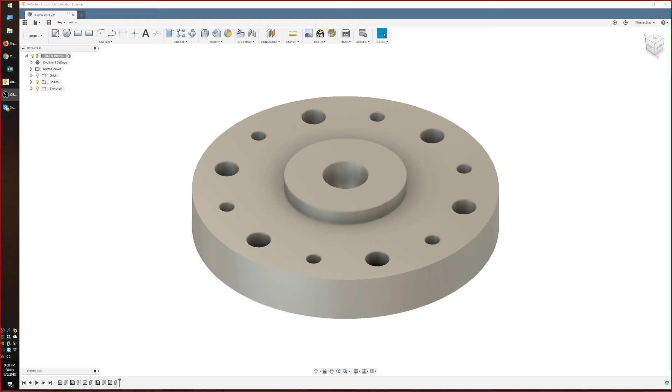All right. So, George, how's it going? Good. I haven't seen you at work today. Oh, were you at work today? Were you not? I took the day off. Oh my God. I needed a day. Well, good for you. A day where I got to go on a trip to Lowe's and buy myself a new tool. That's not a bad day.

This is the struggles of having a full-time job apart from the maker life, as you know and as many other people know at this point. The side hustle slash hobby just always intruding into your life. That's a good thing. It, for me, always will be. I'm not really planning to move on from that, but I like it, and it'll give me a lot more gray hairs in the long run, but I'll take it. You'll feel more accomplished though at the end. Yeah, after many 1 a.m. nights. Builds character. How about you? How was work today? Work was boring.

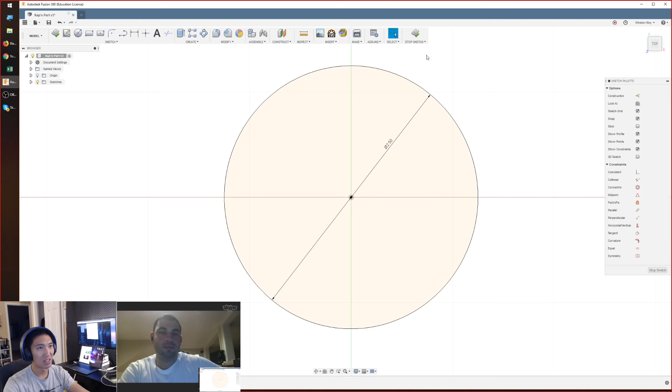But before we do that, let me walk you through what the part is. First we start with the sketch, 2.5 inches in diameter for the body. Extrude that out to, I think it's half an inch, 0.375, 3/8 of an inch. And then we have the little stem here where we would stick in a little handle for a top.

It's a little thicker. So the overall part thickness is half an inch from top to bottom. And I just did a radial pattern of holes around the outside, different sizes. One of them is 0.125, so basically 1/8, with no room to spiral or ramp in for a contour, and the other one is a little larger at 0.2 inches.

And so I'll go over a couple different strategies. How about the middle one? Middle one I think is 3/8. All right, so you got a bunch of different sizes. We'll go over a couple different strategies you can use to just punch some holes in this thing, based on the 2D toolpaths you have available to you.

What's up, RWT? Can you make your cursor highlight so it's easier to see what you're clicking on? I don't know if we're able to do that live, but maybe for the next one we could add that in. Does the cursor not? Oh, the cursor is really tiny, which is the problem. Next time I'll change my resolution to 1080. I'll try and be a little more verbose about what I'm doing to compensate.

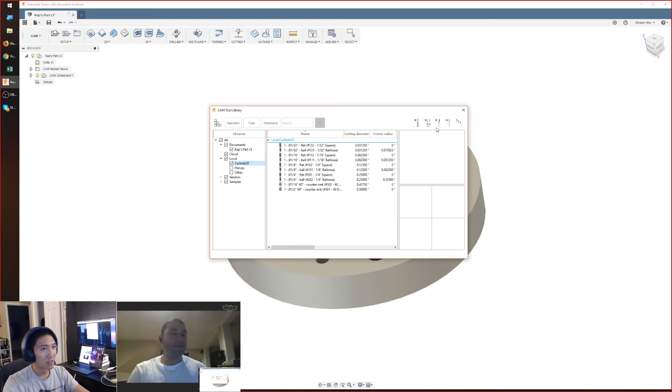All right, so we have our basic part, 2.5 inches in diameter, half an inch tall. So we're gonna go into the CAM window. Before you do anything, you need to make sure that you have some tools loaded up. So there are sample tools in Fusion, which is just a gigantic library of drills and generic end mills, which you can pull from. But I like to create my own little set of tools. Here I've got a list of tools from Carbide 3D that I can draw from and use. And you need to have tools to create a toolpath. So this is sort of the prerequisite.

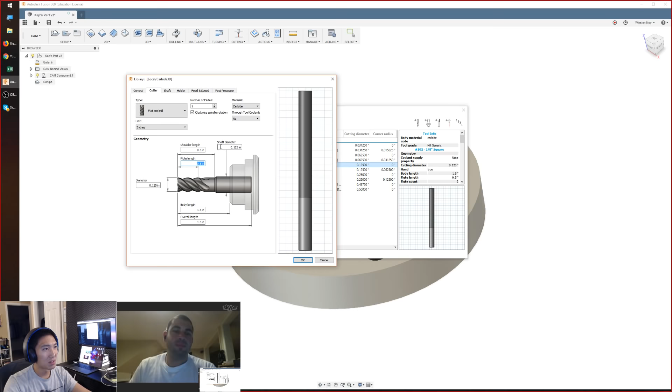So assuming you've got tools. And these are pretty general, right? They don't have to be the specific tool you bought off eBay or anything. Yeah, I'll just open up one of these tools, basically name it whatever you want, and just the cutting parameters. It's a flat end mill. You say it's got 2 flutes or 3 flutes. What's the diameter? How long is it? How long are the flutes? And that's really all you need. And whenever you buy it, that stuff's easily on the label right there. It's just right there for you. Yeah, you should know all this information before it arrives.

Exactly. In the feeds and speeds tab, you can tell it a nominal spindle speed or feed rate, but you're always going to custom tailor or tweak it based on what you're cutting. So I've got a library of standard carbide end mills, but I use them in aluminum, I use them in wood, I use them in plastic, and every single time these feed rates are going to change. Thank you, Kyle.

All right, so we've got tools, and you need to create a setup. So a setup tells Fusion, hey, how big is the stock material you're cutting from going to be? So you create a setup. The first tab is the setup tab, and you can say which way is up. So right now, if you can see the blue arrow, it's facing up, and that's just based on the default orientation of how I modeled this part.

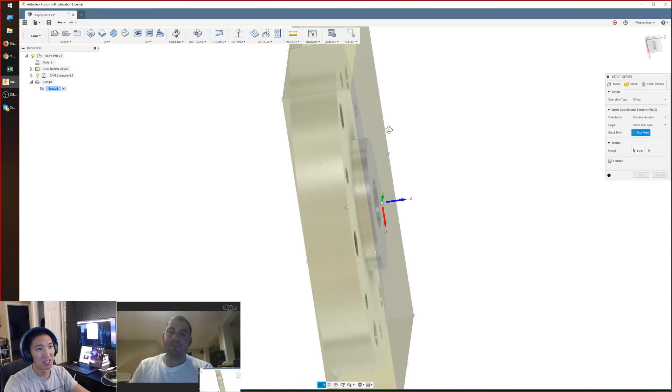And you can change this depending on, oh, hey, I accidentally modeled it sideways, I need a different axis to be Z positive. But here, in my case, I want the blue arrow, Z axis, to be up. If it's not set correctly, you can go into select Z axis and X axis, or basically you can pick any two orthogonal axes to establish a coordinate system. But it's just easiest if you model the part upright in the orientation you're going to cut. And then the most important one, which I know you've screwed up, George, is the stock point.

So that tells you where the 0 point is. So if you're going to zero your CNC by touching the end mill down on the top of the stock, then you want your origin to be at the top of the stock material.

If you're like me and I've often been touching off on the wasteboard, I actually want the origin to be at the wasteboard, so that establishes my zero. So it sort of depends on what you want to do, but you should know where Fusion thinks your origin is. Top of the part, bottom of the part, or some awkward combination of the two.

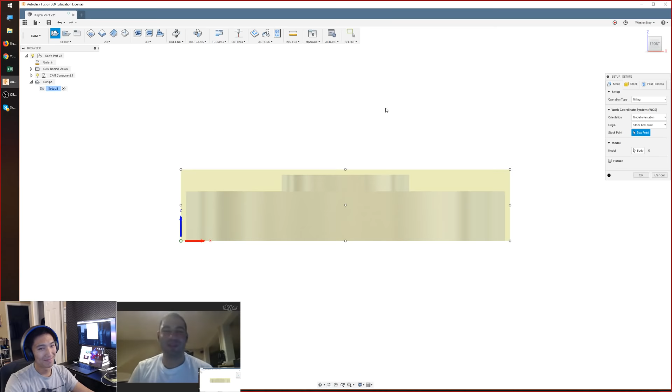Yeah, and the way you know you're going to screw this up, just from my own very recent experience, when you're actually cutting, if you're realizing that the z-axis is way off compared to where it's supposed to be, if it's trying to retract way more or go way past the board, it might be because you just set the origin wrong when you generated the G code. Simple as that, made a nice couple mistakes this week, but quick fixes and then you get it up and running again. So that's what's important to remember in the setup tab.

Next up is the stock tab, and here you can basically say how that yellow volume encompasses the part. If you tell Fusion that, hey, I'm starting with 0.6 inch thick material and my part's only 0.5 inches tall, well, then there's an extra 0.1 inches of material above the part that you want to take into account. But for the purposes of this academic exercise, we're going to say that we have exactly 0.5-inch thick stock. So I'm going to say no additional stock. And so that is our bounding volume of where Fusion can operate.

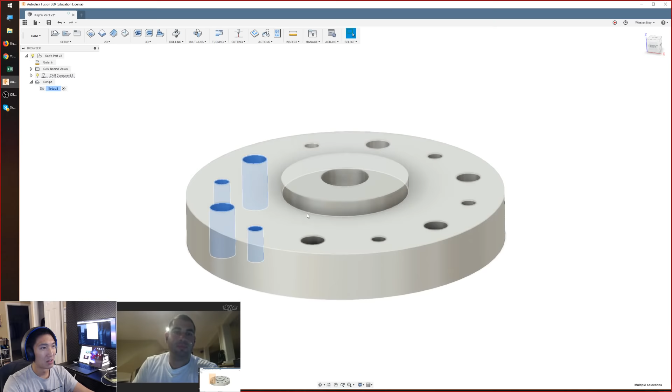So we'll hit OK, close out the setup window, and I think the first order of business is to clear out the material around our central shaft. So this blue face. We have to sort of pocket that out, bring the face of the material down so that we don't have extra material left over after we drill all these holes. And there's a couple ways you could do that.

You could just drop a 3D toolpath on the part, and 3D toolpaths are model aware. So you can just say, hey, I'm going to use a 1/4 inch flat end mill and hit OK. And it'll automatically cut away all the other material around your part. But that's sort of a fire and forget, not very surgical approach.

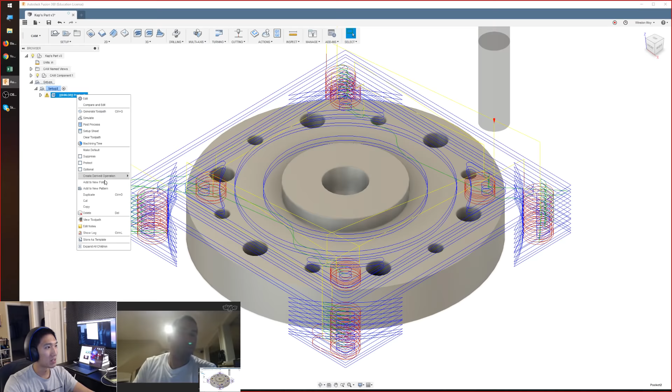What I prefer to do for something like this is to apply a pocketing toolpath. Pick an end mill. We're going to go with a 1/4 inch. We're going to set our geometry. Our pocket selection is this top face. Highlight that. And then I like to just first hit OK, see what the toolpath spits out.

We're going to go through the cutting parameters a little more in depth for some of the pocketing operations for the holes. But for now, I just want to show you how you can select a face and machine away only what you want. So right now, we've got a toolpath that goes around the main stem and takes out the top face. I'm going to simulate it to show you what it looks like. Put on the stock. So it's going to go through and take out most of the material there.

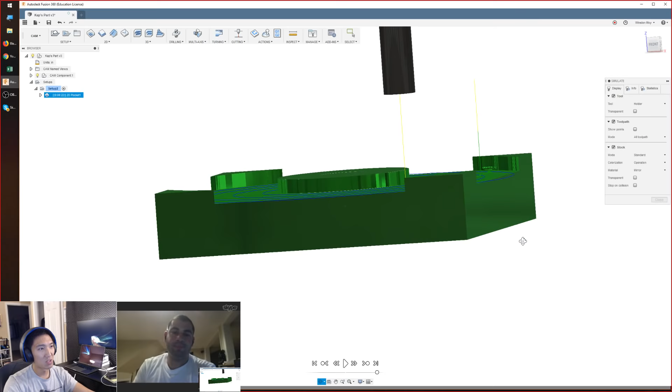But you'll notice that this toolpath doesn't touch the surface completely. And that's because there is stock to leave selected. So if you disable that, it'll actually go all the way down to the surface of the part. All right, so I know I hand waved over a lot of that, but this was just one of the first operations to get it out of the way.

Let's do a 2D pocket to take out some of these larger holes. We're going to use an 1/8 inch end mill. So I'm going to go into my Carbide 3D tool library and pick out an 1/8 inch flat end mill.

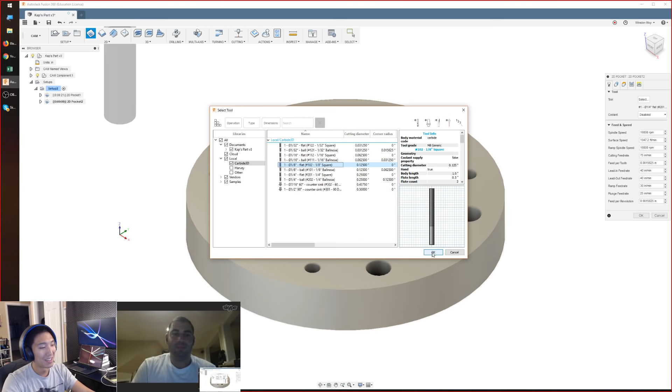Yeah, simulation is an awesome feature. Yeah, and it's fantastic. Depending on the complexity of your part, sometimes it'll also show you part collisions. So you'll see like a gash across your part, and when you simulate it, it's like, oh, that's because the end mill decided to go from point A to point B, and it didn't realize that part of your model is sticking out in the middle of the way or something. All right, so 1/8 inch end mill. Yeah, it's the best way to visualize what the computer's actually thinking when it's giving you that G code there.

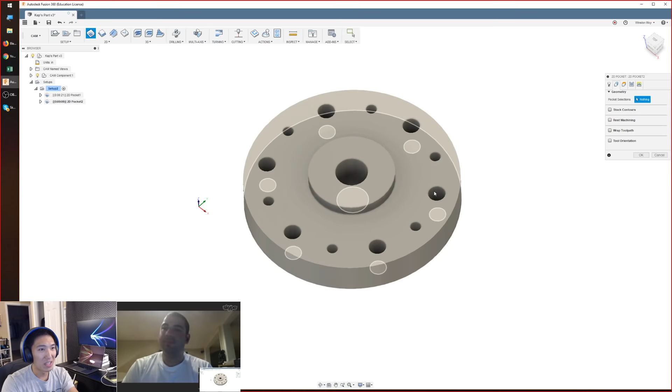Anyway, geometry, pocket selection, that's where you select the contours or the edges or the faces of what you want to machine. So my 1/8 inch pockets, they don't go all the way through. So I can select that face or I can select that contour. But for the big holes, you have to select the edge because there's no face for you to click on. So I'm going to select the edge there. I'm going to select all 6 of the medium-sized holes.

That's some impressive selections there through the top of the part. I always have to flip it around to get to the damn sides. That's because you're probably not a PC gamer. I've got those mouse skills. I am not a PC gamer.

So once you have this selected, that's basically all you need for the geometry tab. For the heights tab, this is where you can establish how far the end mill retracts when it moves or when it pulls out of the part, or when it starts, instead of rapiding into the part, it slows down to a more conservative feed rate. And I'm going to leave these default for now, and I'll show you how you can optimize your tool travel later. So for the passes tab, this is where you really have a lot more control than any other 2D CAM programs like Carbide Create.

So I'm going to uncheck stock to leave for now, but I will do multiple depths. So this means instead of your end mill plunging all the way to the bottom and then drawing a circle, we're going to step down in more conservative increments. So I'm going to do 1/16 of an inch, 0.0625 maximum roughing step down. I'm going to do even step downs, just so that they're sort of evenly distributed.

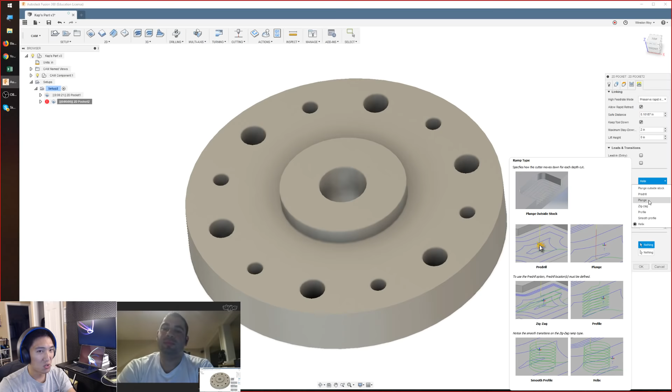So I'm going to go back to the linking tab, and sort of explain that lead in and lead out is, I'll explain that later actually. So ramping is basically the end mill easing its way into the material. Without this, basically how Carbide Create or Easel set up their moves is they'll see a contour, they'll move to the edge of the contour, shove the end mill straight into the material, and get going. And that looks like this.

So the end mill goes basically down into the part and just immediately starts following a contour. So from a different angle, straight plunge into the material, and then it starts moving laterally, which is fine for most materials, but in aluminum, or if you really, really care about accuracy, that's not the best way to go about it.

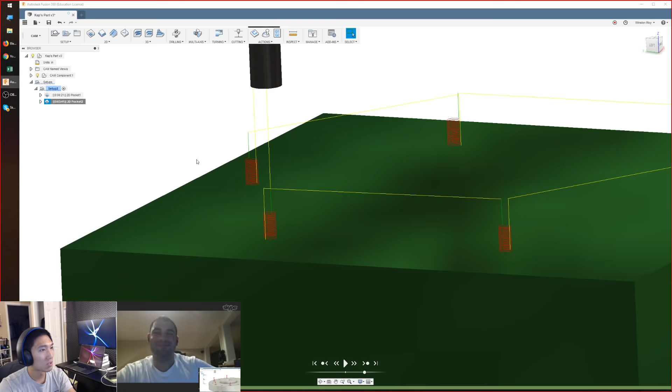And so there are different ways of sort of making it easier on the end mill, and one of them is the profile and the helix. So helix is what usually ends up happening, but the diameter here is set too large, so I'm going to make that really small, 0.05. So a little less than a 16th of an inch diameter helix. And so now what happens is the end mill starts spiraling into the part before it starts cutting.

So that's one way, but the way it's set up now, it's wasting a lot of time spiraling in. So one way to change that is to modify the top height. The top height is basically when your toolpath actually starts planning out its cut. Anywhere above the top height, it's really just moving up, moving laterally to a new position, plunging straight down. Top height is when ramping starts happening, when cutting starts happening.

And so if I set my stock top to this top face, the end mill starts helixing in a lot closer to the part. And I can lower that margin even further by setting the ramp clearance height to something really small. I'm going to say 0.01 just to illustrate how close you can get it. And so now it's getting really close to the material before it starts moving. So if you're sure that this top face is clear, by all means, make the toolpath more efficient and bring the end mill all the way down to the part before you start machining.

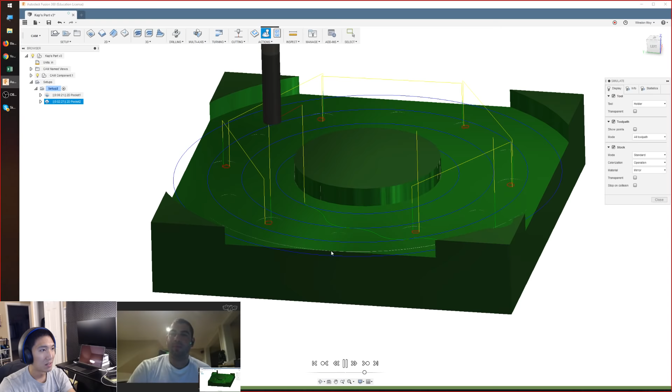If I simulate both of these and go to the next operation, after we've cleared that top pocket, then it starts ramping in really close to the material and it makes that pocket. That's pretty cool.

We've got a question. I'm not too sure what it's actually asking. Maybe we'll ask them to rephrase it. Do you get what they're saying?

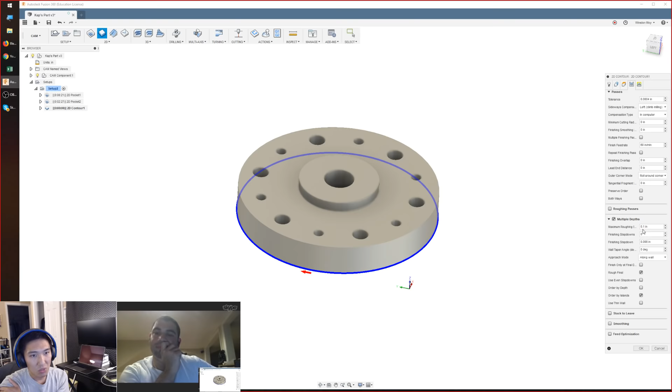So I think what he means is you're seeing basically horizontal striations or just marks as the cutter steps down. So the way you get around that or you improve that is you do a finishing pass. So what's happening is, let me make another. Let me do it as a contour, just to demonstrate. So I'm going to do 0.1 inch step downs.

So what's happening? For those that are watching, the question is, Classic is seeing cutting marks on his plane when he's cutting hard maple. As the end mill is taking multiple step downs, each time it goes around, it's cutting slightly differently, and that's because of tool deflection.

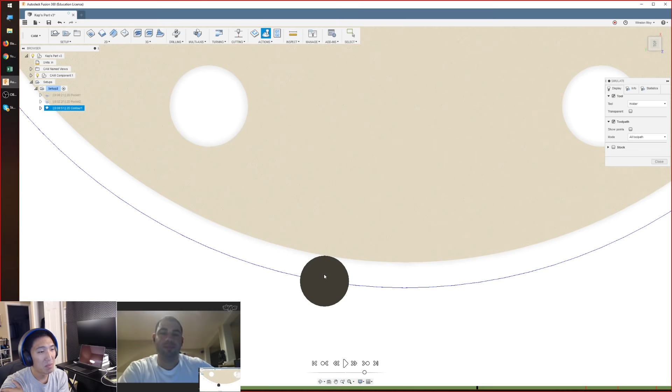So yeah, if you imagine this cutter spinning in a clockwise direction, every time a tooth of that end mill comes around, it's sort of pushing itself off the edge of the material. So this end mill is actually not touching the part when it's cutting. It's actually offset like 1/1000th of an inch or 1/10,000 of an inch. But that's enough that you'll see just a little bit of fuzziness or a little burr between step downs.

And so the best way to get around that is to take one final pass at full depth, sort of just a whisper cut or a spring pass, to clean up that last extra margin of material. Yep.

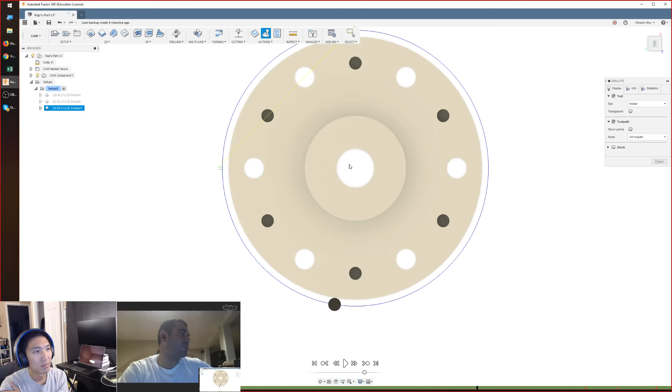And I think I just realized his second question. I think what he's saying is he'd like to just program so that, say he tells it to cut a 1/8 hole and just put in a 1/4 inch end mill instead, so that he's just cutting double the area. But I don't know why we wouldn't just put that in the model at that point. Do you see that second one there? Because I'm not sure I'm entirely following. Trying to do like double the work. Yeah, if you could rephrase that second question, Classic, we can kind of get to it. But I'll try and address a couple things.

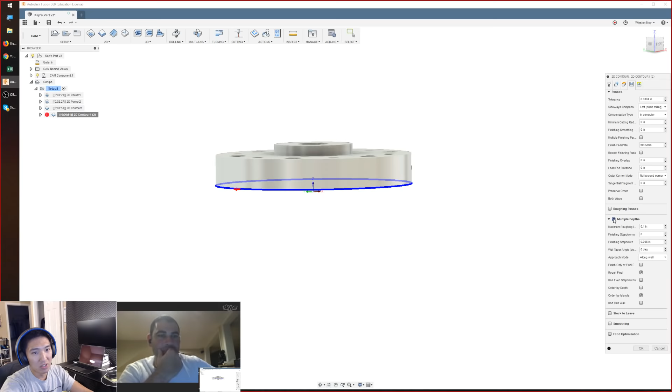So if you're trying to do a finishing pass, like let's say you made this first cut around the part and you're getting marks and you want to clean them up, what I like to do is just duplicate, Control D or right click, duplicate a toolpath, go into it, go to the passes tab and just turn off multiple depths. So that way, the first operation cuts all the way down. Yeah, that's great. The second operation just comes in at the full depth of cut and sort of cleans up that wall. That's a nifty trick. You create that pretty fast like that.

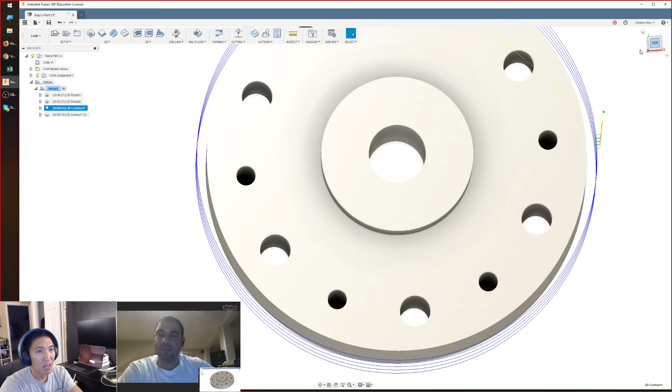Yeah. You can also, to enhance that, because sometimes that last spring pass or the whisper cut won't get everything, leave a little extra stock around it. Just like 4 thou up to 10 thou. And so what's going to happen, I'm going to zoom in from the top down. That first pass goes around, it leaves a little margin, and that second toolpath, if you look closely, is just a little further inside. Look at that. That means when that comes around it's cleaning up and exposing fresh material all at once.

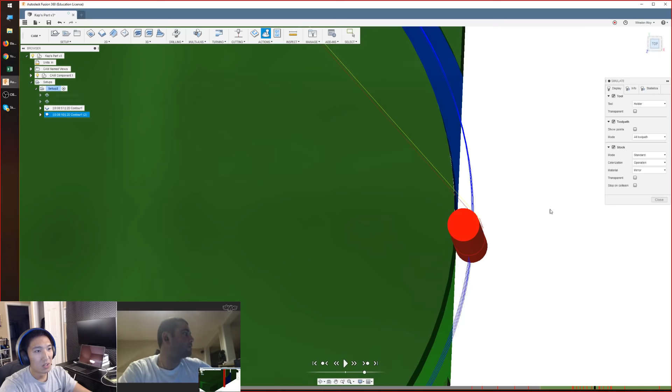And what that looks like in the simulation, run on the stock, is first pass and then second pass. Gotta pause it. So it's exposing just a little more material when it's coming around again. I think that might actually answer his question from what it looks like. Cut the same spot twice, clean it up with another end mill. Same kind of concepts there, but let us know, Classic, if that kind of answers it for you.

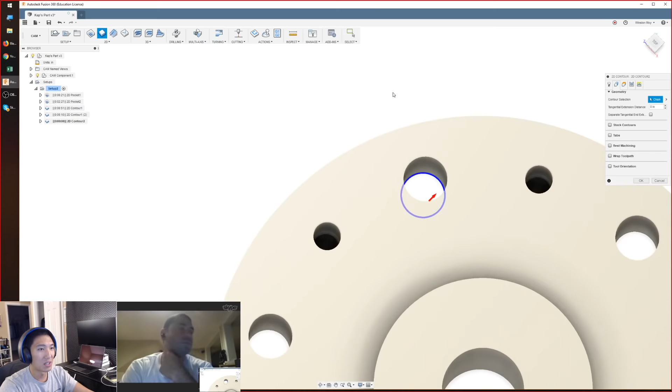All right, so technically where we should be is just finishing these first holes using a pocket operation. So pockets are one way to make a hole. Contours are another way. Contours are what I just used to cut around this part, but you can also just select the inner radius, and I'm going to turn off lead in. And it'll basically just trace the bottom part of the hole.

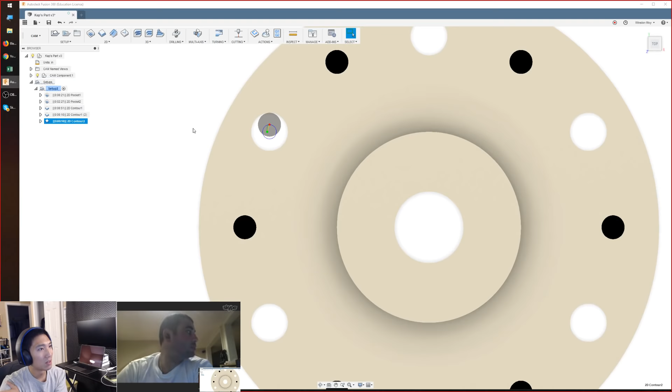You could, of course, do this in multiple step downs, which is much safer. Let's say 0.1, even step downs, whatever. This is just as an example. So you could come down and cut out a hole that way. Why you would use pocket versus contour: in holes like this one, where your diameter is less than 2 times the diameter of your end mill, your end mill can walk around that hole and not leave anything in the middle.

If you were to contour the center hole, you would actually leave a little plug of material in the middle that could break loose and jam the cutter. A really small bit of stock that's left over isn't going to cause any issues, but you never want unexpected wood where you don't know it's going to be when you're cutting, right? The fewer surprises you have, the better. And so in a case where your hole is larger than 2 times the diameter of your end mill, I'd rather use a pocket and methodically just clear out that hole completely.

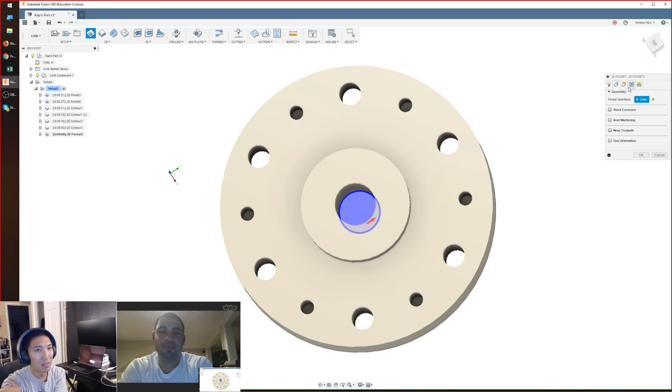So instead of that contour, I would rather pocket out that entire hole. We'll do step downs of 0.07, no stock to leave, just run it. And you could have also done a contour with tabs, right? I mean, that would be fine. But getting tabs in that little section in the middle... Plus, that little nub, its footprint is very small, so it's very liable to tip over, be knocked over, so it's just better not to tab that part.

Good point. Yeah, agreed. So we've got holes about 2 times the diameter, down to 1 times the diameter. Holes above that, you can use contours, you can use pockets, it doesn't matter. For the smaller holes, I like contours just for efficiency's sake. For bigger pockets, use the pocketing operation just to make sure it's more complete. Or if it's like a massive pocket, then you could tab that little core in the middle that would be left behind.

For these holes, 1/8-inch holes, you can't move laterally inside that hole because that's the same diameter as your end mill. So you could either get a smaller end mill, or you could use a drilling operation. Now, most people say you shouldn't use drilling operations.

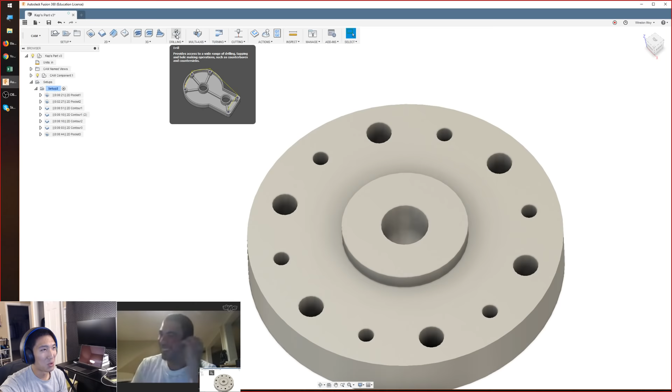Got a plane coming. That is a motorcycle roaming our neighborhood. That's a motorcycle? Wow, that's... yeah.

Great. Anyway, so most people say drilling operations don't work well in a CNC router because the RPMs are too high. You just get scorching on the walls. But for short drilling operations, it's pretty okay. That's how I made my DIY vacuum table. I just took a 1/16-inch end mill and just pecked out a bunch of holes. So for these 1/8-inch holes, especially in wood, I wouldn't do this in aluminum, but in wood you could totally get away with doing a peck drilling operation.

So the way you use that is you select the tool. I have the 1/8-inch selected. RPM, you're not controlling that, the router's in control of that, not Fusion. Plunge feed rate, pick something safe, 15 inches per minute. Retract can be pretty quick. We'll go like 45.

And I don't know how many Maslow users there are out there, but this type of drilling operation is going to be, I think, even more useful for the Maslow users because you're able to cut away without pushing the router away from the plane. I'm going to be making a video about it on my YouTube channel. I don't want to get too much into it here, but this is one to pay attention to if that's your CNC of choice. So sorry, I keep going.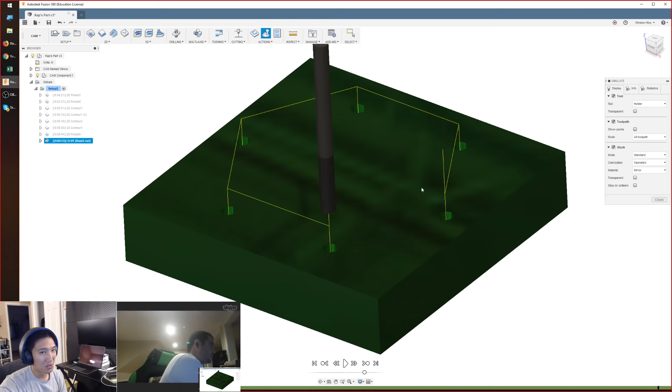That's right. So if you select the holes and you hit OK, your drilling operation is going to look something like this. Straight down, straight back out, and that should be okay. What's a safer way to do this is to peck drill it so that you retract the end mill at certain increments so that you can clear the flutes and make sure that you're not just grinding sawdust into the walls and causing friction and burning and terrible things like that.

So the last tab in the drill operation is cycle type, and you can say something like chip breaking with partial retract, and that gives you a couple more options. And how that works is you can say, I'm going to peck in 0.05 inch increments. When I drill an accumulated depth, so I'm going to say 0.15 inches, it's going to retract out. Chip break distance is how far you're backing off each time. I'm going to do 0.03. I think that should be able to illustrate the point.

And I'm going to simulate this. I'm going to turn off stock just so that you can see what's going on. So if you look closely, the demarcation of the flutes on the shank, you can see it's going down, it's coming back up, and it's going down. So from the beginning, down by 0.05, down by 0.1, down by 0.15, and then it retracts all the way.

That's pretty cool. And so doing that, you can sort of guarantee success by making sure your flutes are cleared, and it's a lot less stress to do it this way than to just plunge the end mill all the way down, all the way back out. So that's my preferred way to drill out. I'm definitely going to be using that in the future. That's pretty sick.

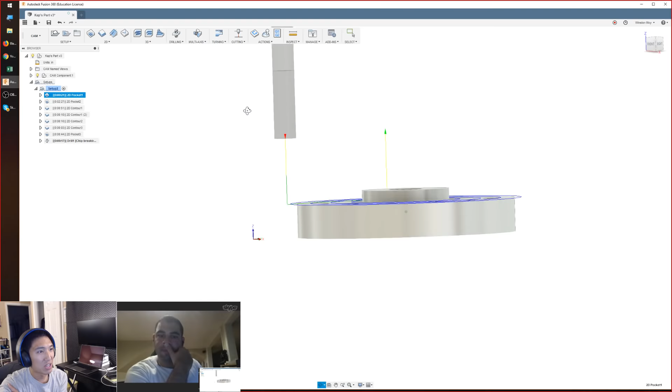I think he said facing it, right? I want to make a flat surface. So if we talk about that first operation, where I'm just taking the part down and building up that little core in the middle, I can use multiple depths and say, instead of coming down 0.1 inches at a time, I can make really tiny passes. I can do 1/32 of an inch little cuts, so that each layer that I'm cutting is really low stress on the CNC.

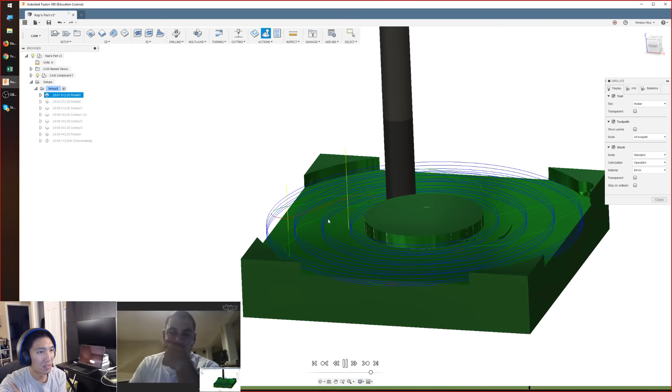So I'm just coming down layer by layer, 0.03 inches at a time. You can change that step down to whatever you want until you feel comfortable that your machine can handle it. Yeah. I could do this entire thing with an 1/8 inch end mill, so I don't have to change tools. If you're comfortable with tool changes, great. If not, just go slow and steady until you develop the workflow and the right checklist to make sure that you can do it properly.

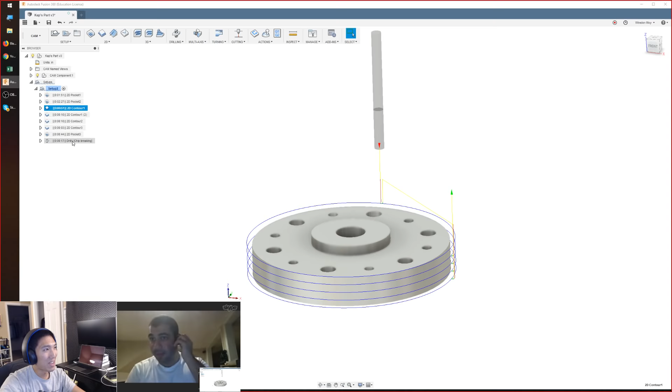If anyone else has any questions about specific toolpath parameters that they want to get a little more info on, just drop them in the chat. But I'm going to run through my nominal process of how I would tackle this piece. It might be a little fast. Some of the topics might be a little more advanced, but I just want you guys to have an understanding of how to tackle this, or different ways. Yeah, this will be recorded, so everybody can play it back later. Yeah, it's just good to get an understanding of what are the possibilities, what are the variables you can play with, so that you know what questions to ask later.

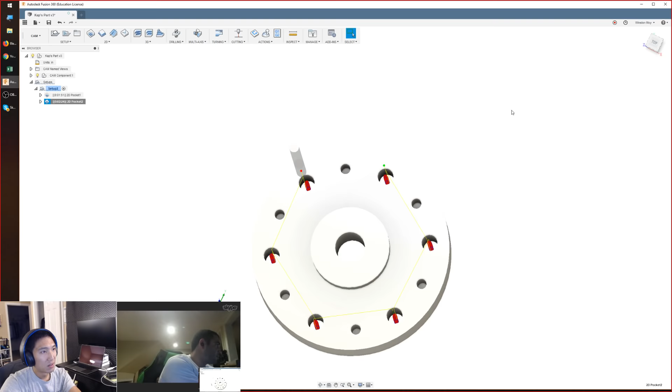All right, so we've assumed that we face the part down to this level. When I'm doing this pocket, that's pretty well optimized. I'm going to do one thing different. I am going to use some stock to leave. 0.01 inches, nothing axially. I just want a little extra thickness on the walls, such that when I'm cutting, you can see the end mill is leaving just a little extra on the walls. I'm going to come back with a contour operation, I'm going to create a derived operation, 2D milling, 2D contour. And so basically, using the same tool, same geometry, it creates a 2D contour operation based on the previous one.

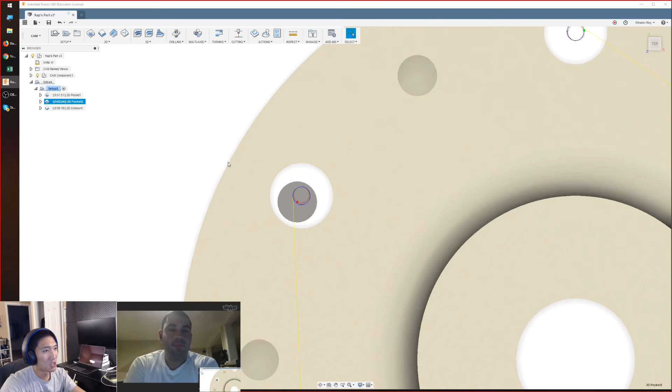Yep. I'm going to use multiple depths of about 0.1 inches because most of the material in these holes is gone. So I can take a little more aggressive pass, and that's just going to clean up, with no stock to leave, the rest of the walls. So first the pocket, then that cleanup contour. And the two of them together should leave me with a pretty good tolerance hole. Because most CNC machines, there's a little backlash, they will actually create a smaller hole. So you got to come back with a really light cut that doesn't stress the machine, and the machine can just effortlessly move out to that outer boundary that it needs to cut. Gotcha. So initial pocket, hog out most of the material, contour the rest.

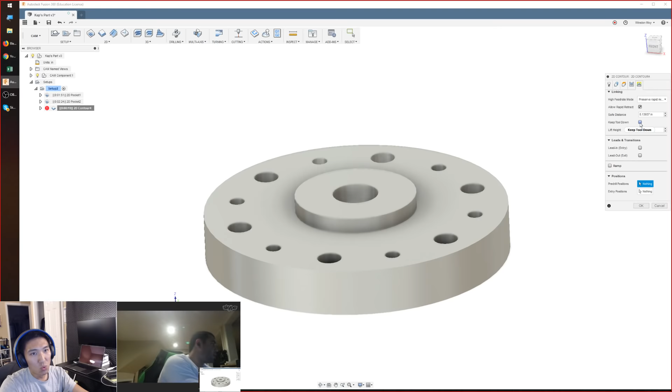And since I'm doing this contour as multiple step downs, when I simulate it, I'm going to turn off stock so you can see it. Go to contour operation. It's going to go down, go around, and step all the way down. If you didn't have keep tool down checked, it would retract in between each layer. So that's one way to speed up the process. If any of you have drilled holes by watching the end mill go down, move around in a circle, go all the way back up, then go all the way back down, that's because you didn't have keep tool down checked. And so that saves a bunch of time while you're waiting for the Z-axis to move.

Oh my god. You just taught me that.

Oh, that's sad. All right. Still a noob, that means. I'm still getting there. That's great. Could have, should have kept that to myself. Blue circles. All right, anyways. Oh. All right, I think I understand.

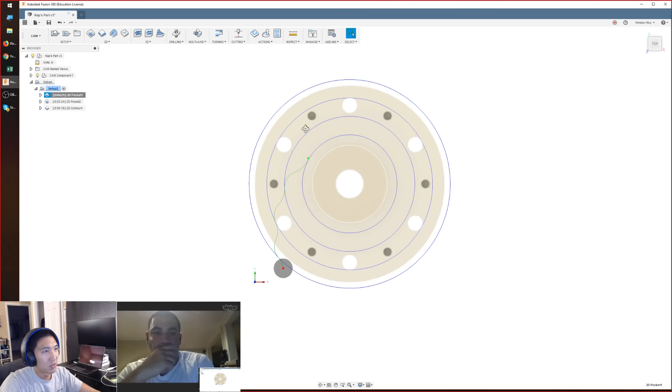Classic. So he's asking about step over. He wants to step over at 1/8 intervals. Computer's slowing down. So I'm going to change this back to, so let's say you start with this toolpath, and to bring your material down to this face, you're going to have a lot of sort of concentric grooves in your part because your step over is really large.

So sort of your cleanup, your finishing for that facing operation would be to, I just duplicated that pocket operation. I'm going to go into the passes tab, and I'm going to change the maximum step over down to, I like about 60% of the tool diameter, so like 0.15. Or you could reduce it down to 1/8. So now you can see initial toolpath, follow-up toolpath to clean it up. Your step over is a lot smaller, and that should give you a much smoother finish on the top. Yeah, I think that's exactly what he was looking for.

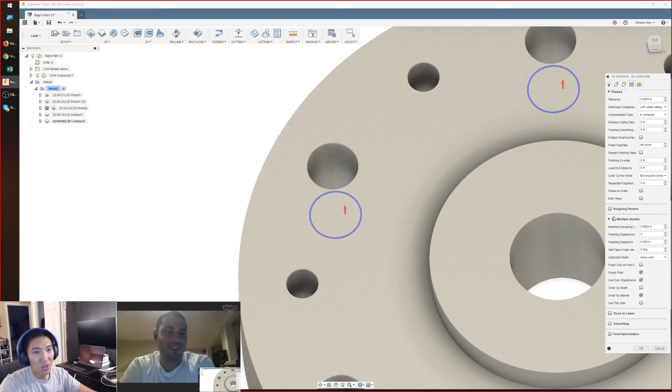All right, so we've got medium-sized holes, sort of pocket to clear it out. We could actually do that as a contour. So you can see there are multiple step downs there. So to do that more efficiently, what I actually like to do, create a derived operation. It's a lot of them. 2D contour. Whoops. I canceled that prematurely. 2D milling, 2D contour. No multiple depths. Ramping all the way down to the bottom. Let's go about 5 degrees.

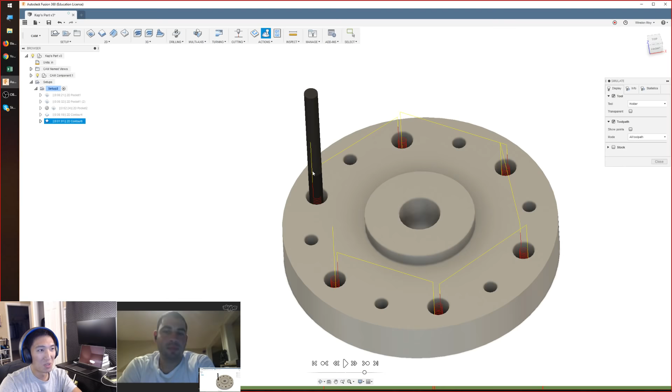And what that's going to do is your end mill is going to spiral all the way down to the bottom of the part. It's not going to stop, do a layer, then step down again. It's going to spiral all the way down till it hits the bottom. It'll move in a circle just to make sure it's gotten everything, and then it'll retract. So it's one continuous motion. And that's the quickest way to contour a hole, assuming your diameter... Does it do a full circle at the bottom, right? Yes, to clear it all off at the bottom. Yeah.

So it's spiraling in, hits the blue, and it does one complete circle, and then it steps back. So that's the smoothest way to make a hole. If you want to make sure you get through it, you could actually choose the bottom plane to be the bottom of the stock instead of the bottom of the model, so that you know you're getting through your part, and you cut through some of your wasteboard at that point.

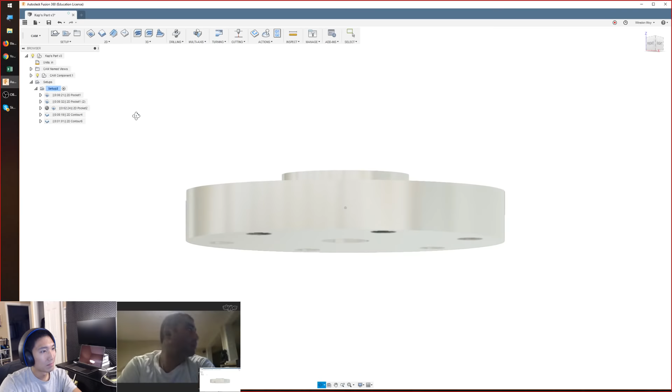But that's to confirm. Oh, did we lose you? Because I'm full on the Skype here. I was. What have you studied? I did my undergrad in mechanical engineering. We had almost no hands-on experience with CNC. We made our own G-code by hand once for a class project, and my teacher screwed it up. And I never touched a CNC until after I did grad school. So, engineer by training, but all of this actual digital fabrication stuff is self-taught.

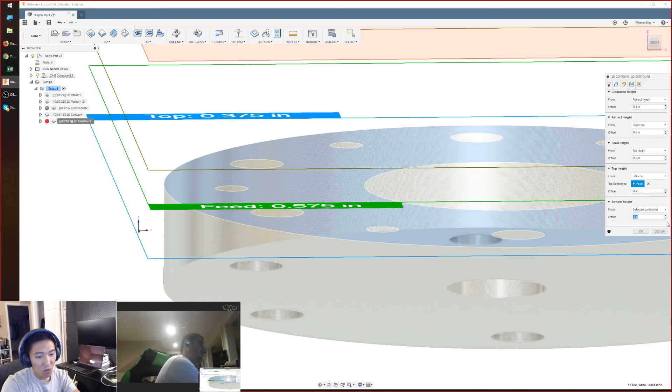So what George was talking about is if you want to make sure that you cut all the way through your part, sometimes you leave an onion skin on the back, you can go into the contour or pocketing operation, go to your heights, and normally your toolpath would end at the selected contour. So since I selected these bottom rings, it would stop there. I can say overshoot that by negative 0.03 inches, let's say. And now the toolpath shoots through the bottom a little extra.

So you can use that to sort of guarantee a cut, or if you didn't cut through the first time, you just repost this G-code with that little tweak, and that'll make sure you get a clean cut all the way through.

Yeah, exactly. Yeah, that's why the electrical engineers struggle in here. Yeah, but you know, some people know about their outlets, and then some people... We're gonna do. Yes. We gotta do like engineering, Mechies versus EEs, some cool project of some sort.

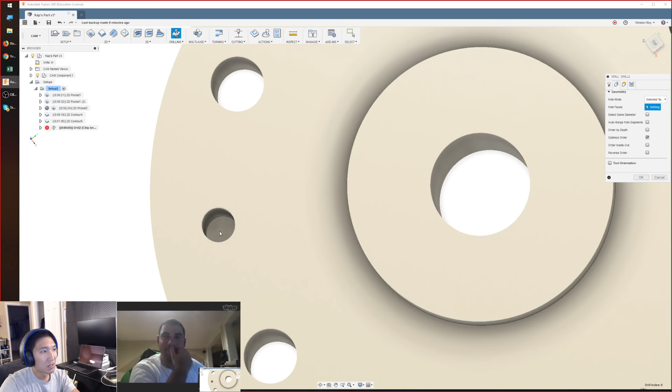All right, so you cut through all the holes now. As per what I explained previously, I'm gonna do selected faces. You pick the walls of the hole, so it has a reference for the axis of drilling for the drilling operation. So drilling operation for the holes that you can't afford to move around laterally in, and then I'm going to do a pocketing operation on the center hole.

Now I'm going to do something different. I'm going to pick the top hole. Sometimes your contours are hard to access, either because there's a construction plane across the middle or just some geometry in the way. All you need to do is select the right contour such that when you project it in the 2D plane, it's in the right spot. And then change your bottom height to stock bottom. And so now this pocketing operation will still go down to the bottom, even though I picked the contour around the top. But that pocket I want to do in multiple step downs.

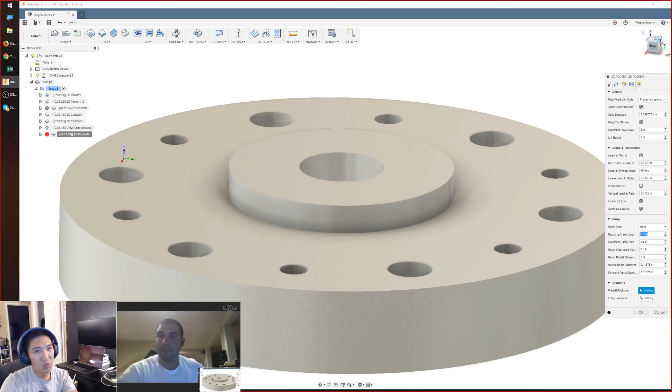No stock to leave, multiple depths, 0.06. Let's see how that looks. That helix is wasting a lot of time. So I'm going to... helical ramping moves are great for aluminum in particular, just because even if your end mill is center cutting, that initial plunge into material can be a pretty shocking move from a physics standpoint. You're basically engaging the entire area of the end mill all at once. So 2 degrees up to maybe 4 degrees is what you want to shoot for a helical ramp in aluminum.

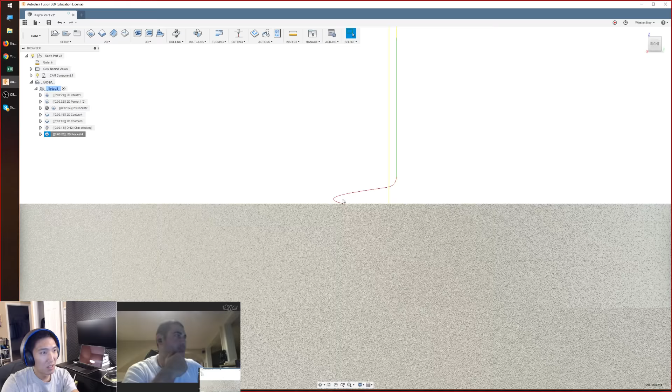But for wood and softer materials, you can actually increase that angle to like 8 degrees. And so now you can see that that helical move is a lot faster. And furthermore, I'm going to adjust the starting height so that it starts much closer to where the part starts. So now we just have a little bit of that helix shape sticking out beyond the part. So let's see what we have so far. Select the entire setup, select simulate, show the stock, and just run through it.

And for those that haven't seen the simulate tool before, you can actually see how long this entire thing should take. So that's another very useful feature of the simulation tool. In the statistics option, it's showing about 5 or 6 minutes to cut this part. And I can also see that, hey, I forgot to do the outer contour. So always simulate every now and then, just to get your bearings on what's left to do.

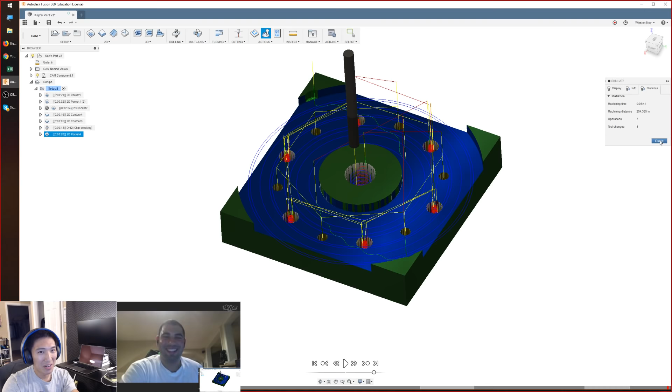So I'm going to select 2D contour, pick that bottom contour around it. It's still defaulting to the 1/8 inch end mill, 40 inches per minute. I actually want 60. Passes, we're going to do 1/16 inch step downs, or 0.065, close enough. Even step downs, no stock to leave. It's got a little lead in, which I'll take. The lead in is that little initial U shape. So when the end mill comes in, it's easing into the material, making contact slowly. Nice thing to have.

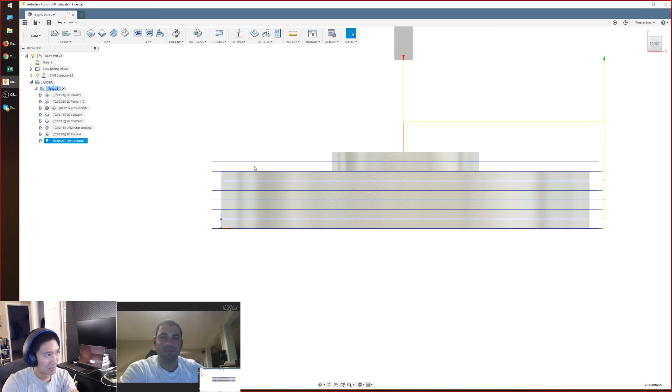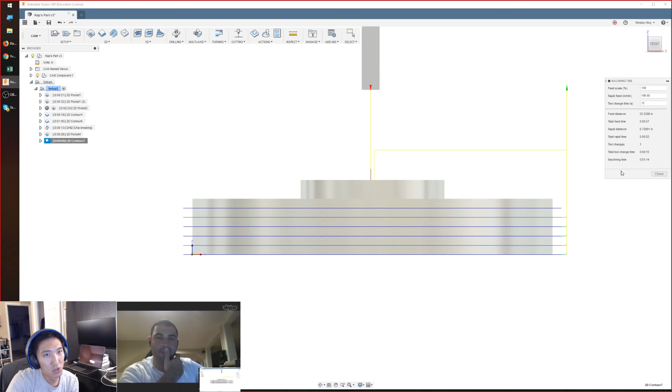Can you also right-click each cut? Yes, you can. Over here, you go to machining time, and you can look up just that toolpath's statistics. That way if you see the whole thing's taking an hour and you got to see what got screwed up, you can single out what looks to be the longest for some weird reason.

You know what's also taking an hour? This live stream. Yeah, you see, I was on the money. I told people, I prepped them, it's gonna take an hour. Winston, you just know so much. That's a problem. You got so much knowledge to share. I think you're just slowing me down. I like to keep the people happy. I like to communicate, you know. You are too happy. Anyways, now you're the one that's derailing this whole thing. We were almost there.

So if we simulate this entire thing real quick.

We're getting to witness our true relationship here.

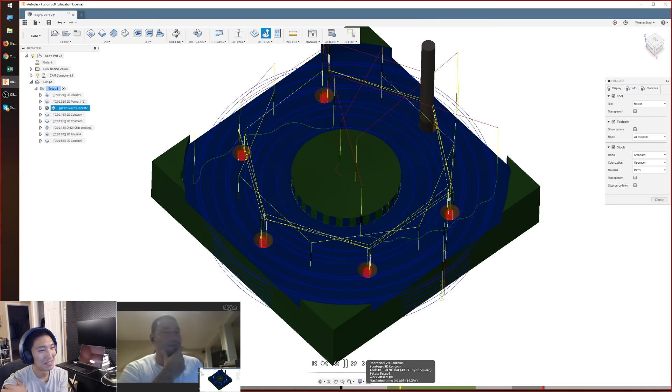So at the end of the day, simulate. Drill, come on. Bore out the center, cut around the outside. That's it. Some of the ways you could improve this, if you notice lines around the outside or the outer surface not being perfectly smooth, is to run that contour with some stock to leave, about 0.01 inches, and then, like I said before, duplicate it, turn this into a finishing pass, just single pass, no multiple depths, no stock to leave, and it'll come around and clean up the outside. So initial rough contour, and then that little finishing contour that's just inside of it to clean up the walls.

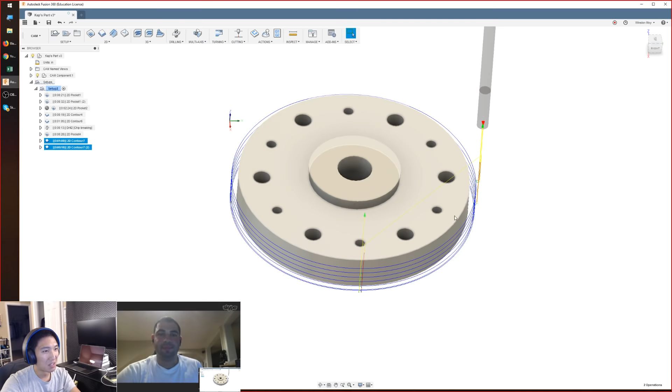So if you're looking for ultimate precision and you're getting just a little bit of rubbing or lines horizontally across the part, or you see a little U-shaped indent where the end mill is first going in, and that disturbance is digging into the part just a little more than you'd like, run that really light finishing pass at the end and that should clean it up.

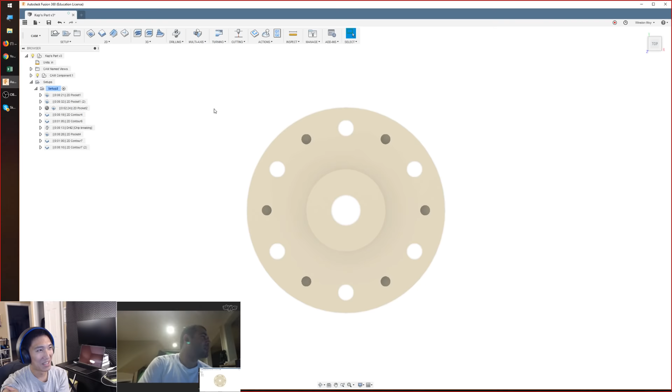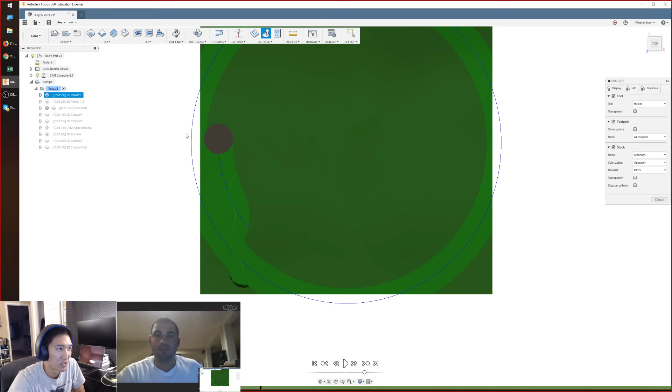Should you use adaptive clearing instead? So adaptive clearing is good because it controls the lateral and axial cutting loads that your machine experiences by controlling how much you're digging into your part. So if we look at this pocketing operation, I'll look from the top down. Hopefully that shows. As you cut, the entire cross-sectional area of your end mill is plunging into material at all times. When it comes around the next time, it's still basically shoving the entire face of the end mill into fresh material. So in aluminum, that can be really stressful, and so a standard traditional 2D pocketing operation kind of sucks.

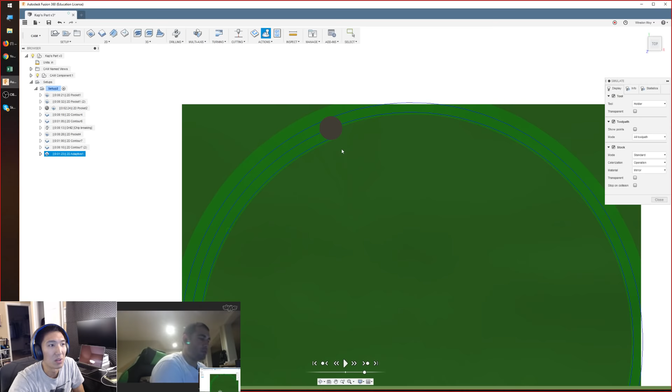If you do this with a 2D adaptive, I'm going to select that top face. I'm going to simulate that. We'll go more than one pass. About there's good. Top down, you can see that only a fraction of that end mill's cross-sectional area is engaging material. And sure, you could approximate that with a smaller step over in a traditional 2D pocketing toolpath, but there are some cases, like when your part isn't round and when you're going into corners, where that small step over gets you less cutting load, it won't always work out that way. So adaptive, you're always engaging with, here, about 40% of the end mill. I'm just going to make a really quick part to show you where 2D pocketing operations fail. So in corners, they don't work so well.

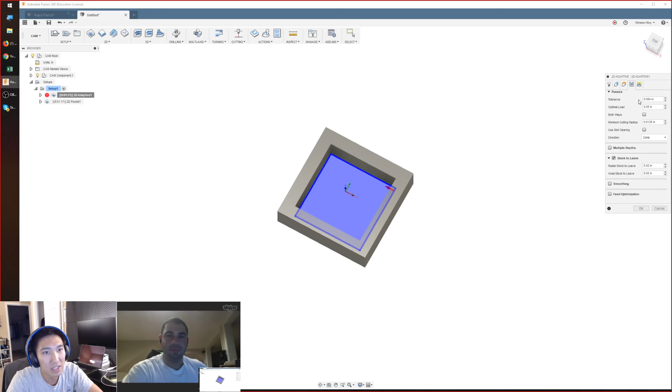So I'm going to really quickly just throw in. So we've got an adaptive there, and I'm going to throw in a traditional pocketing operation with a step over of 0.05, roughly 40%. Let's see what my adaptive's optimal load is. It is also 0.05. So in most cases, that adaptive toolpath step over and this pocketing are pretty close. So you would think the cutting loads are going to be the same. But if you simulate the pocket operation, it's spiraling in stupidly.

Man, it's going all the way down. All right, so this is the cutter moving through material. It's only engaging with 40% of the cutter's cross-sectional area. Then when it gets into the corner, all of a sudden, you've got this wide arc around its edge that is in contact with material. So the load, the strain on the spindle has suddenly gone from 40%, it's basically doubled the contact area.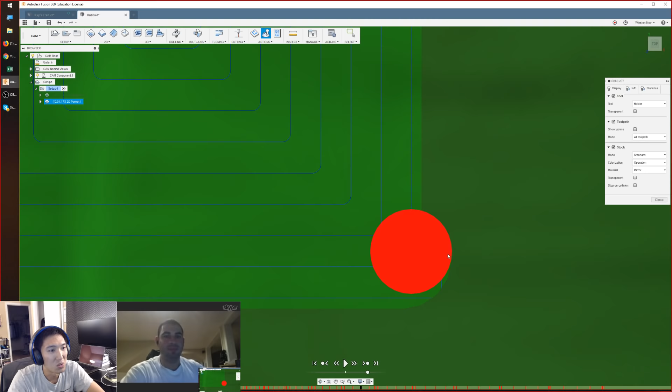Yes. And so your end mill is going to dig into the part a little more. You're going to get a little more deflection. It's going to want to kick out, push itself down, and actually it's going to push itself to the left if this is spinning clockwise. And so the loads are fluctuating wildly as you go through this corner. And that's with a traditional pocketing operation.

In an adaptive, I'm going to skip ahead to after we start cutting. It is always, at any given time, using only 40% of that cross-sectional area. Even when we get into the corners, it is coming back and taking little nibbles such that the engagement's only 40%. And so that is where the adaptive really comes in handy.

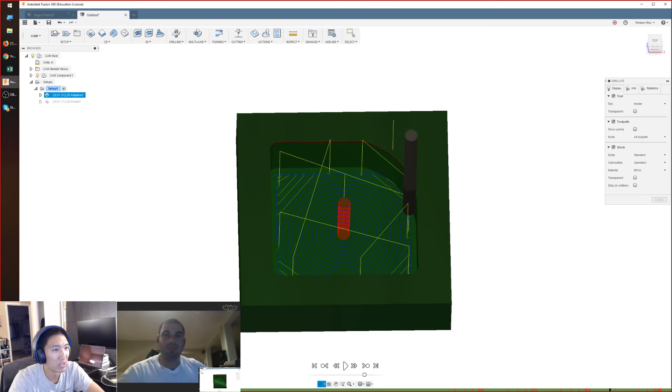In aluminum, where your machine's pretty close to its performance envelope, the adaptive really makes it easier on the machine. But in wood, a comparable adaptive is going to take longer than a similar pocketing operation. So here I'm going to do a pocketing operation, use basically a full step over versus an adaptive's. I need to use the same end mill for a good comparison. And let's say the optimal load is like 0.2. That actually came out okay.

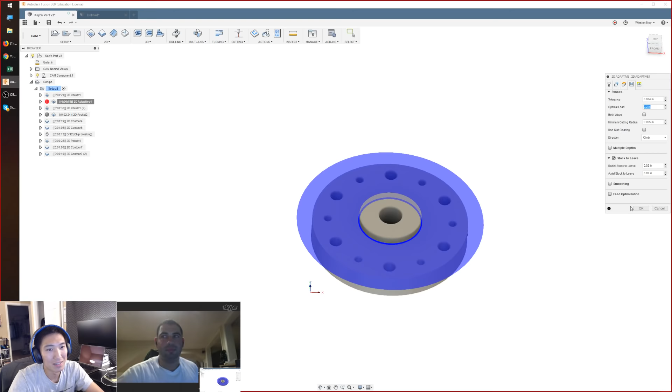But there's a lot of cases where if you're doing an adaptive and you're doing a deeper cut but smaller optimal load, it's just easier to go with a traditional pocketing operation. And the calculation time's lower. Mm-hmm. So if you don't care about the spindle load, if you're cutting a soft material, you can just get away with a regular 2D pocket. It's a little easier. Yeah, it makes sense.

So that's all I really have for different approaches to machine the holes in this part. If anyone else has any questions as we wrap up, let me know.

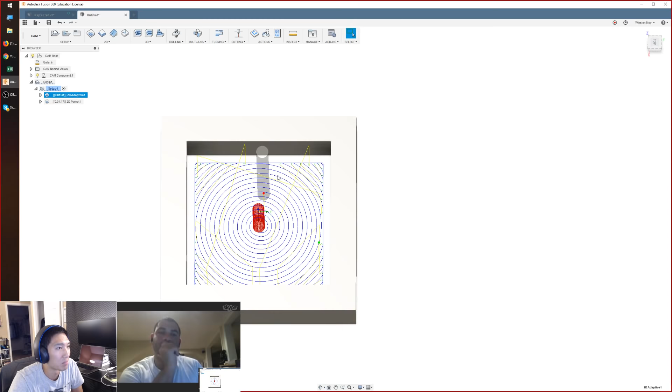The problem with the adaptive is that depending on the geometry, you have a lot of time spent over here in the corners. Your end mill is looping into the corner, following that curve, and then disengaging from the part. So it's actually almost spending half the time not cutting. So I'm going to show you a different part that I was machining earlier today, where it's a really narrow part, and the adaptive toolpath just spent a lot of time not moving.

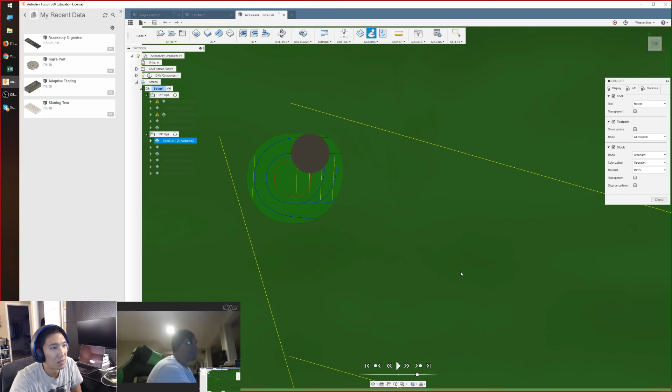I want the 1/8 inch. I think it was these pockets. So the adaptive clear here, as it goes through its slotting, is spending a lot of time. Come on. The yellow parts of that toolpath are where it's disengaged from the part. So it's cutting, and then it's spending some time not cutting, moving to the next optimal position to start cutting again. And so for about half that time, it's actually not cutting.

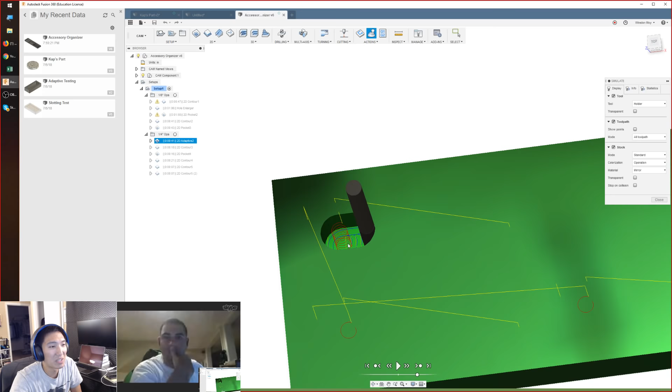I'm using adaptive here because the depth of cut is really deep. We're talking like 5/8 of an inch. And the only way you can do that is by engaging a limited percentage of that cross-sectional area of the end mill. So I am trading the step over for depth of cut here. So adaptive isn't necessarily faster, but in this case, by allowing me to take that full depth of cut, it is faster.

But for large, flat 2D areas, especially if you can just use a dumb, regular 2D toolpath, sometimes it is faster to just not do adaptive. It's situational. You can try out both. Yeah, I was gonna say you might as well just make both, simulate them, and you can see. It'll tell you. Unless you have a really complex part. And then it can't. Yeah. Yes.

I would, you know what? I'm just going to show the part for next week's video. Hopefully this weekend's video, if I can really get around to editing it. One place where I probably should have used a 2D pocket and not an adaptive, and that is the SpaceX Dragon bottle opener that I made.

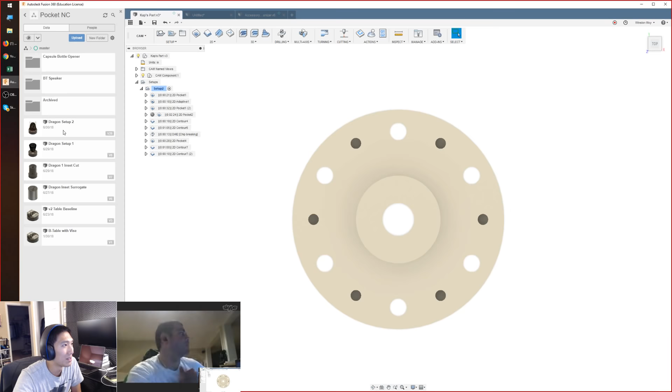Oh, man, this is cool. I gotta tell you, this. Yeah, this is turning into a big old show and tell.

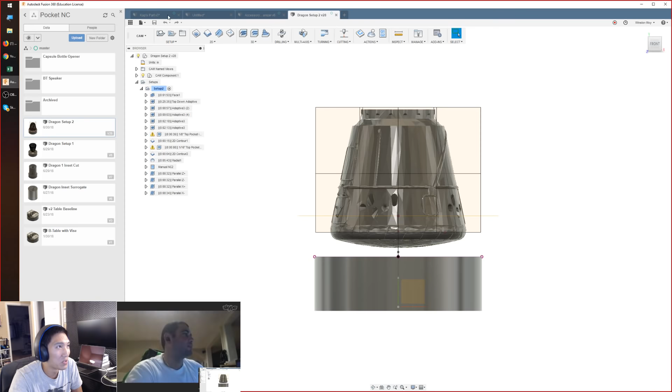You can take out some of that transit time by increasing the move speed. So, man, this part is taking forever. The adaptive toolpath setting is called no engagement feed rate. I have mine set to 500 inches per minute, so my Shapeoko is flying when it's not actually cutting. But you need to change your GRBL settings to bump the limit up. It's set by default to about 200 inches per minute, but the Shapeoko can handle way more than that. So that'll be in the video of how I overrode that limit.

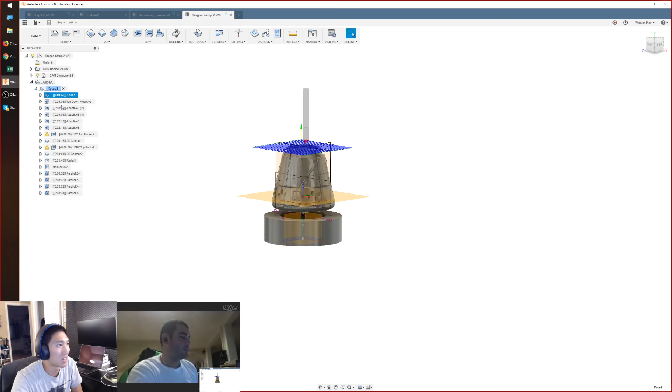Anyway, so this is the setup for my bottle opener Dragon space capsule. The way it works is first operation, face the top, do an adaptive from the top to clear out most of the material, and then come in from each of the four sides to clean up the rest of the stock around it. Now, these toolpaths are all adaptive, and there's a lot of linking moves and transitions as this thing cuts. So you actually spend a large amount of time waiting for the end mill to move back and forth.

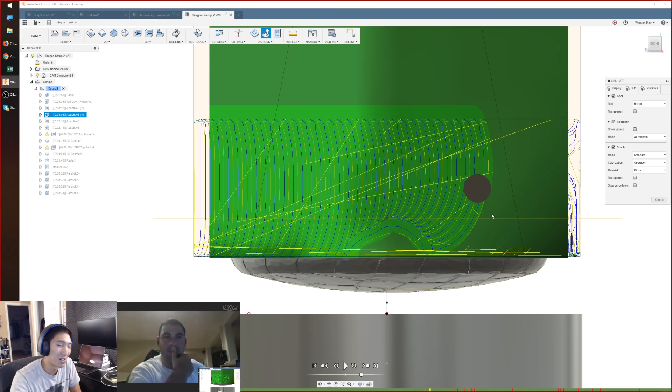You can get around that by enabling both ways adaptive, but by default, the adaptive toolpath will move from top to bottom, back off, move to the top, and then start cutting again. And with the Pocket NC's feed rates maxing out at 60 inches per minute, you spend a lot of time waiting for that movement. So in this case, I feel like I should have just done a 2D pocket. I'm only cutting this out of wood, so the loads are pretty manageable, and the toolpath would have looked a lot cleaner than this spaghetti.

So it's situational. Use a little judgment where you think you need it, where you think you can get away without it, what's faster, and that's basically all I can say for when to use adaptive, when to use regular pocketing. So that's it. That's all I got.

If anyone else has any questions... That looks pretty good, man. Oh wait, threading experiments...

Threading experiments on the Pocket NC? I have not yet, but I think Ed Kramer might have. If you check his Instagram, I think it's ekramer3. He's done a lot with the Pocket NC. He's been doing it for longer than I have by a couple weeks, and I think he's shown off machining mild steel on the Pocket NC, so he's definitely pushed the machine harder than I have. He has a more methodical approach to testing. So if you're curious about what it's capable of, I would check him out first, and at some point, I'll do thread milling on the Pocket NC. I just need the right project.